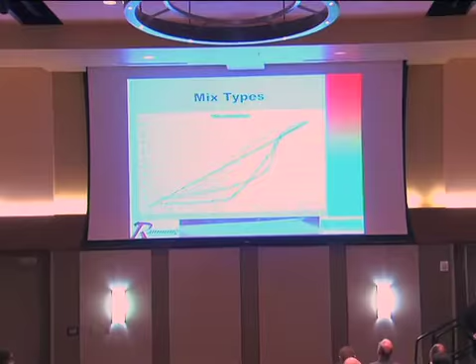So mixtures designed with Superpave. Really, those are the 5 mix types, and Darlene talked about SMA, Mike talked about TOM. Those are both up there, and PFC is up there as well. All of those mixes can be designed with the Superpave gyratory compactor. So essentially, we're making Superpave mixes right now in that we're using the Superpave gyratory compactor. The dense graded mixes are that red line right there.

Well, I must be really nervous. That thing's just shaking like crazy.

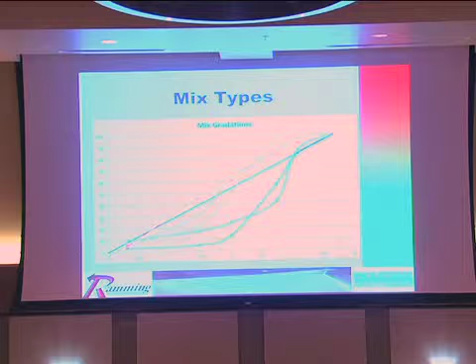And that brown one down there, also a dense graded mix. Both can be made in the Superpave compactor under the 344 spec. This one that dived down to 0, that's the PFC, your open graded mix. And then that one right there is your SMA. And that orange looking line is a TOM mix. And actually the TOM mix doesn't even quite fit on that chart because the max density line for the TOM should start right here. And it would look more like an SMA gradation because it is more gap graded than open, in my opinion. But for whatever that's worth.

So there's 2 types of dense graded mixes you can basically make. You can make them in a Texas gyratory. You can make both of them in a Superpave gyratory. One is the dense graded coarse. Now this is where Superpave tends to get a bad rap in Texas because the original architects of Superpave intended the mixes to be made like this.

And the reason for that is that at the time, this was before polymer modified asphalt. This was before high amounts of recycle, and there was a big rutting problem in the nation. And so they said, we want that, which is commonly referred to as stone-on-stone contact, so that we can resist the rutting. And as time has evolved, people have said, okay, we've got polymer modified asphalt, we got recycle, we got these other things, we can kind of get away from that. Because these mixes can be problematic. They can be problematic in construction, definitely, and very problematic in design and control through the plant.

You can make that kind of mix in a Texas gyratory, and you can make it in a Superpave gyratory. It's coarse graded. The big rocks and the little rocks kind of work together to make the mix and actually support the traffic. And you do have some coarse aggregate contact. So you see some of the big rocks are kind of in touch, and that's where the stone-on-stone contact part of that comes up.

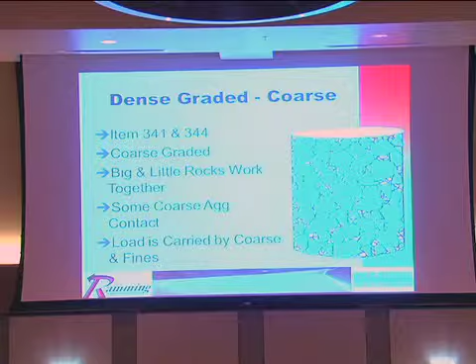When I was at Mathy, we designed a few of these. Like I said, they were difficult to work with in the plant. Could be difficult to compact in the field, but primarily we based all our mixes on traffic counts, or ESALs. So these were the mixes that we were designing for our E10 and our E30 mixes. I don't think we actually had any traffic in Wisconsin that met 30 million ESALs over a 20-year design. But we did have some 10s, and we would try to favor these because they held up better under heavy traffic. They're not widely used anywhere in the country.

Again, medium and high volume roads are typically what they're used on, mostly on surface, sometimes an intermediate. About the same amount of asphalt, maybe a little more depending on what your VMA ends up with, than being on the dense side of that max density curve. Definitely can be more difficult to compact. You're getting closer to what an SMA is when you're going down below that maximum density line. And anytime you do that, and the further away you get from that max density line, it's going to be more difficult to compact.

And also, you probably remember way back when Superpave first came out, we had the restricted zone, and that eventually became the reference zone. The restricted zone was created for these mixes. And if you are going down below that line, you don't want to come back up into that reference zone. What the designers of Superpave realized is that at the time there were a lot of contractors who would use a lot of natural sand in their mixes. They'd sand up the mixes to help get density and to help workability of the mix. When they did that, it really hurt stability, and they would end up with a lot of rutting problems. So definitely with this type of mix, you want to stay out of that reference zone.

The other thing that's commonly heard about Superpave is it's tender. It's a tender mix. That, again, is another aspect of these dense graded coarse mixes. They have a likelihood of being tender. But my experience with tenderness is it's really a gradation thing rather than being a Superpave thing or a Texas gyratory thing. You can make a mix that's tender based on how the aggregates are going to pack with one another and how they're going to move past one another. We've made mixes down here that have been tender. We made some adjustments to them, and we got them untender. But you can have a dense graded fine mix that's tender.

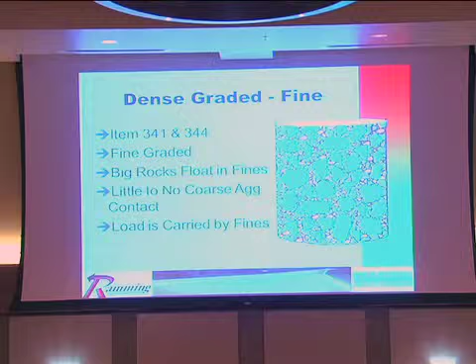You kind of see what Darlene and Mike were talking about with the fine TOM and the fine SMA. Asphalt contents are going up because they've taken a lot of these big rocks out and just put a lot more little ones in there and generated a lot of VMA. Little to no coarse aggregate contact. It's not meant to do that. Big rocks are just there to fill up spaces, and the load is definitely carried by the fines. That's why it's very important to have some angular fines in your screenings or your man sand, and things of that nature. And that's typically what your dense graded fine mix looks like.

Now we're completely on the other side of the 45 curve. So we're staying up here above it pretty much down till you get to about the 50, when you cross over and hit your 200 down low. These have very wide use throughout the country, just not here in Texas. Your types A, B, C, and D, the alphabet soup of mixes. That's what these are typically. These are your fine graded, dense mixes.

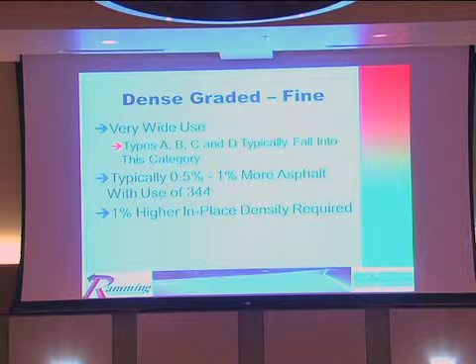Typically, with the use of Superpave in 344, you're going to see about 0.5 to 1% more asphalt in these. Like I said, I talk a little bit more about that at materials, but it has to do with the VMA and the requirements of the specifications. And then also, this one is going to have a 1% higher in-place density requirement. You've got to meet a 92 on a 344 versus a 91 on a 341. So in my estimation, from an agency standpoint, you're getting a better mix, because it's been proven through studies over many years that the better you get density in place, the better durability and life you're going to have out of that pavement when it's opened up to traffic.

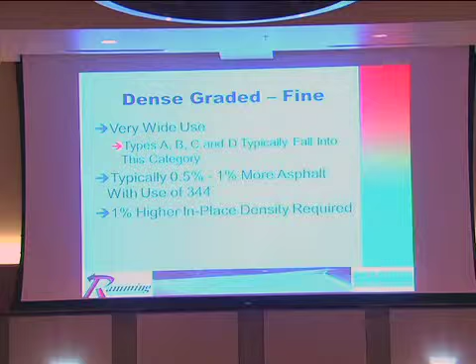So with 341, the use of a pneumatic roller is required. It's still one of the method things they've left in the 341, that you have to use pneumatic. But with 344, I really don't think you need one. Again, having cut my teeth up in the upper Midwest and having had the privilege of working with contractors throughout the country, pneumatic use is just not that wide. Most of the time people have 2, 3, or 4 steel wheels on there.

But the difference is that 0.5 to 1% asphalt really does a lot to help negate the initial cracking that you may see under a steel drum roller in breakdown, that you don't have to knead back together with the pneumatic. So, like I said, it was very unusual for us to use pneumatic rollers in some of my previous lives, because we could get the density with 2 or 3 steel drum rollers, all vibrating, and didn't have the cracking type issues. Even a lot of times when I had to get an extra 1% or 1.5% with my finish roller at the very end, I could usually bang the heck out of that mix, even if it got down below 200 degrees, and I wouldn't crack it. Now, a lot of that has to do with that extra 0.5 to 1% asphalt.

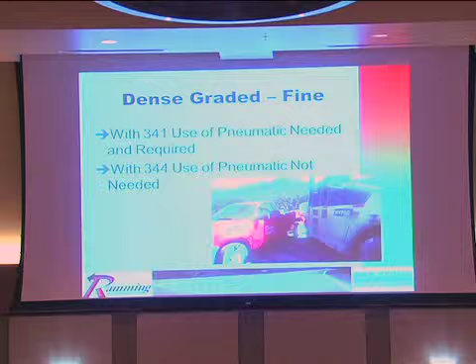And another thing, if you're not going to use your pneumatic, it's probably better just to park it back in the shop rather than let the brakes fail and have it run downhill into a pickup truck. Luckily, the guy was not in the pickup truck at the time that happened.

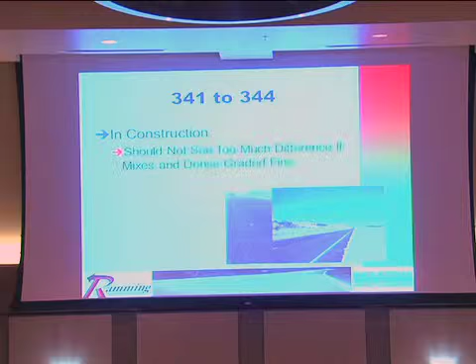Again, get my control down here, and typically can make those things pretty consistent. That's a 341 that is here in Central Texas, and that is a Superpave mix, not in Texas, actually from another state. Can't really see, they're kind of small, but it's kind of dry looking, harsh. Whereas this is a much finer mix, and I think you can tell in those pictures it's got more asphalt in it. So, construction, you shouldn't see too much difference between 341 and 344.

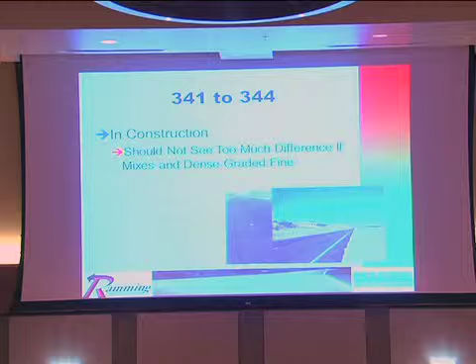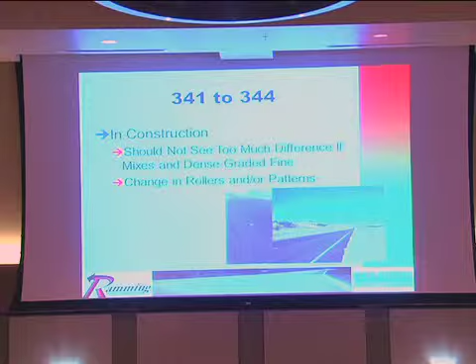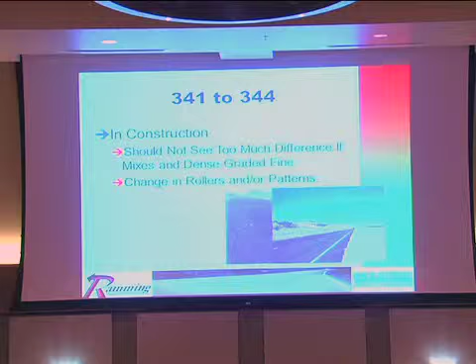If I'm out there, typically I'm not going to see too many differences where I have to have a different paver or a different crew or even different rollers. Now, I may have to have some different roller patterns, and I might even have some different rollers. Like I said, I might have the opportunity to take a pneumatic off and maybe even go with just 2 steels to get density. But really, you don't need to train new people, don't need to get new pavers, anything like that. It's not like all of a sudden you need to get a spray paver or something of that nature. I don't think you're going to see a lot of differences in how people construct these things.

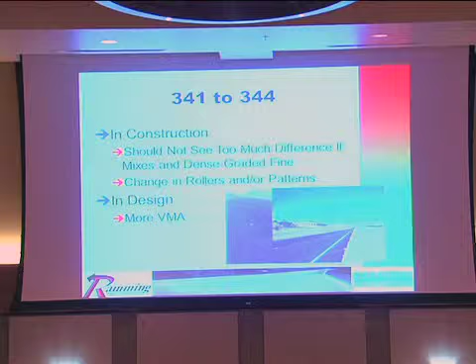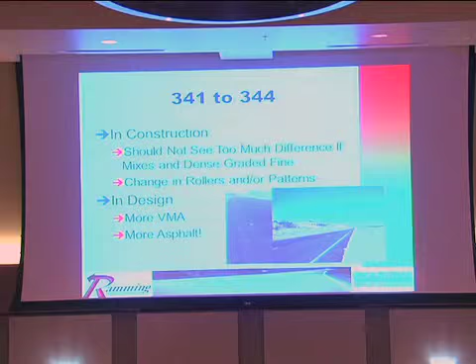In design, definitely going to have more VMA. One of the overall issues on Superpave, and I believe this firmly, our mixes in Texas, our dense graded mixes, are dry. The first time I came down here over 10 years ago, I started looking at some mixes, and I'm like, this mix is dry. People would be like, no, it looks fine. And I'm like, no, this mix is dry. And they're like, well, this is normal.

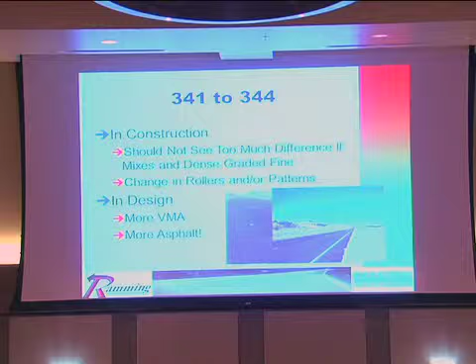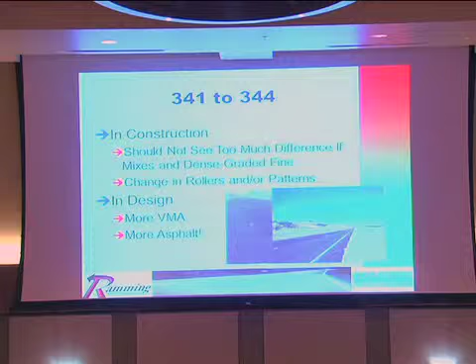Our mixes, and I hate always comparing Texas to other states, but you go across the Sabine River, you go across the Red River, you're typically going to find at least 0.5% more asphalt in mixes. And that's, I think, one of the reasons why the push is on to go from 341 to 344. Get more VMA. We can only fill up VMA with two things, air and asphalt. And now that will give us more asphalt.

So the last thing I want to talk about, I think this is my last slide, is two mixes that we have out of one of our plants. Same plant. They're both Type C mixes. That first one is our 341 Type C. As a Type C, I hate that mix. It's dry, it's harsh. It actually tends to be kind of difficult to compact. I'm working with some of the guys right now, and we've got some room that we can maneuver up here. I'm like, get that thing off the density line. The density line basically is your maximum theoretical density line. If the gradation falls on the density line, theory is that's the least VMA that you're going to be able to get.

That 14.2 wouldn't make the 344. It'd fail that, so it's a 341. And actually, I don't even believe that number. I think that number is probably closer to 12. But we kind of measure VMA here in Texas in a goofy manner. That's a discussion for another day. 4.9 asphalt, 14.2. That's our 341 Type C. The exact same plant, exact same aggregates, nothing's different, except now I've got 5.4 asphalt, and that one I've got 16.1 VMA. That is a better mix. In my estimation, that is a better mix.

And I think that's a better mix for y'all, even though you're going to end up paying a little bit more for that. So here's the big thing. If we keep specifying this, that's what my managers are going to push me to give. Because if I'm trying to bid that, and my competitors are all bidding that, I'm giving up $2 a ton, just on asphalt. On a 50,000 ton job, that's 100,000 bucks. And I've seen a lot of jobs that people have won for a lot less than $100,000.

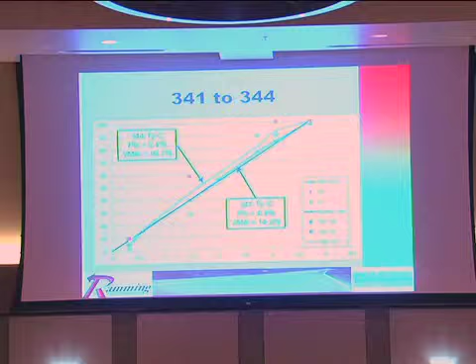Oh, I remember. Actually, this mix right here, you can see, doesn't even pass the Superpave C gradation. It misses right there. So actually, this mix would fall under a Superpave or 344 B. So the max density line would move out here, and it would be more like this. Actually, that would be a really good B mix. And that would be a B mix I'd be proud of, because I'd have 4.9 asphalt, 14.2 VMA, and a B mix, which is pretty good. For a C mix,